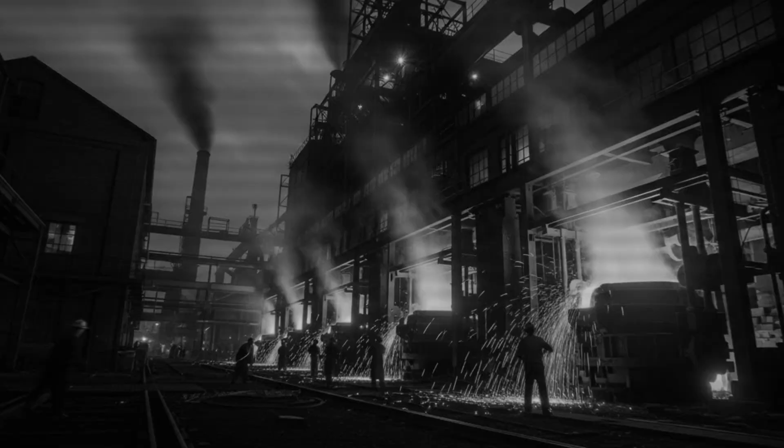As the bomb bay doors opened and thousands of pounds of explosives fell toward the factories below, German fighters swarmed in. Messerschmitts and Focke-Wulfs tore through the bomber streams. Tracer fire stitched the sky. Aircraft burned. Crews bailed out. Others vanished in spirals of smoke. By the end of the day, 60 B-17s were gone. Over 600 airmen were missing. More than 100 were dead.

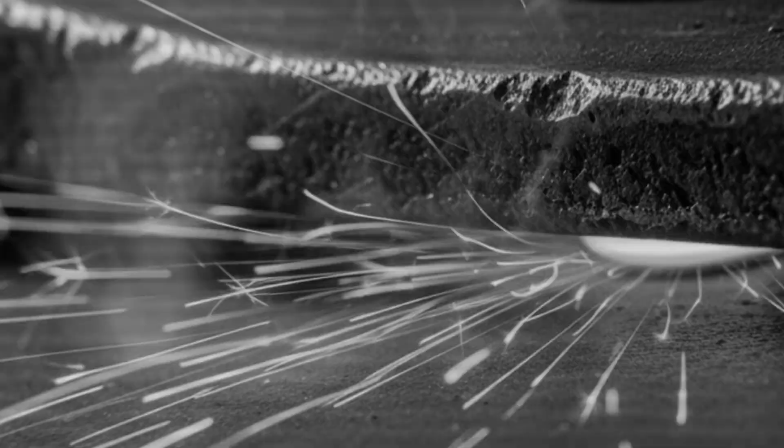While American crews were dying over Bavaria in an attempt to cripple German bearing production, something deeply ironic was happening thousands of miles away, in quiet industrial towns across the United States. American factories were already producing a bearing Germany could not easily replace, could not quickly copy, and could not stop by bombing Schweinfurt. A bearing that worked better for most military applications, a bearing that did not depend on German technology at all. Its story began not in World War II, not in Ohio, and not even in America, but in the mind of a German immigrant carriage maker, working in the late 19th century, obsessed with a deceptively simple problem: friction.

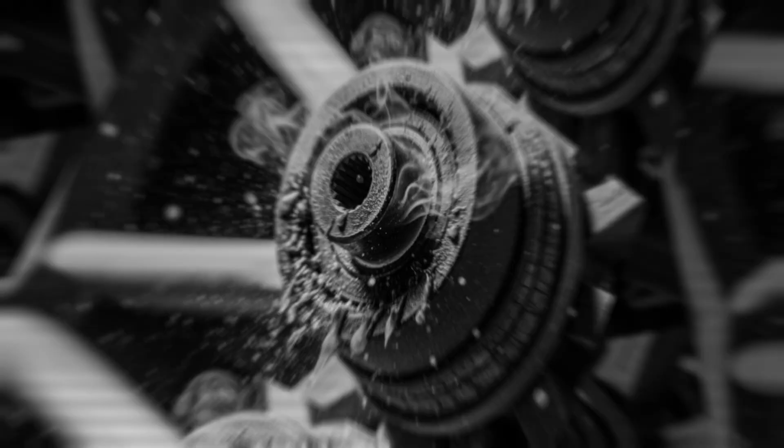Friction is the enemy of motion. Whenever two surfaces move against each other, energy is lost. Motion becomes heat. Metal wears. Efficiency collapses. From the first wagon axle to the most advanced turbine, controlling friction has always been one of engineering's central challenges. Henry Timken believed that anyone who could meaningfully reduce friction would create something of lasting value.

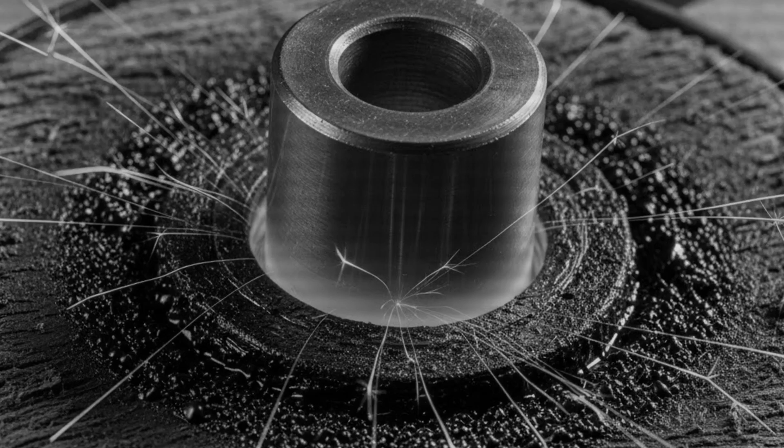He was born on August 16, 1831, in the Kingdom of Hanover, in what is now Germany. When he was 7 years old, his family emigrated to the United States, settling in Missouri. America was young, expanding, and hungry for infrastructure. Wagons, railways, machines, everything was being built, and everything depended on parts that could move reliably under load. As a teenager, Timken apprenticed with a respected wagon and carriage maker. He learned woodworking, metalworking, and, more importantly, the realities of mechanical failure. Axles seized. Wheels wore out. Bearings failed. Every breakdown was a lesson.

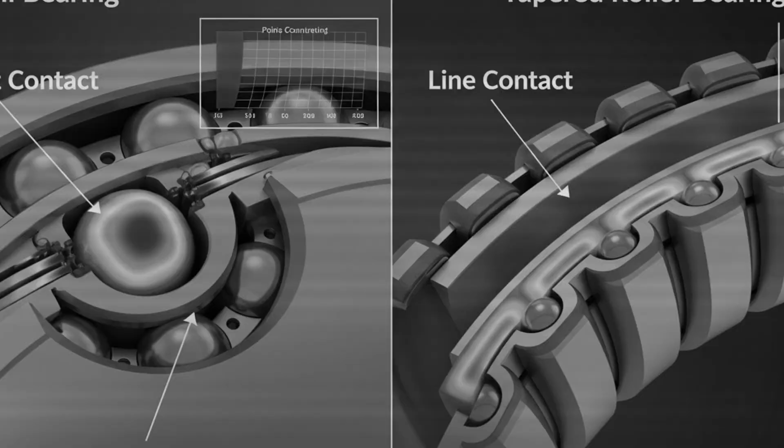By his mid-20s, Timken had opened his own carriage factory in St. Louis. He was not just a craftsman, he was an experimenter. In 1877, he patented an improved buggy spring that distributed load more effectively and survived rough roads better than existing designs. The spring was widely adopted across America and produced under license by multiple manufacturers, generating steady royalty income. The success of the spring brought Timken financial security and time.

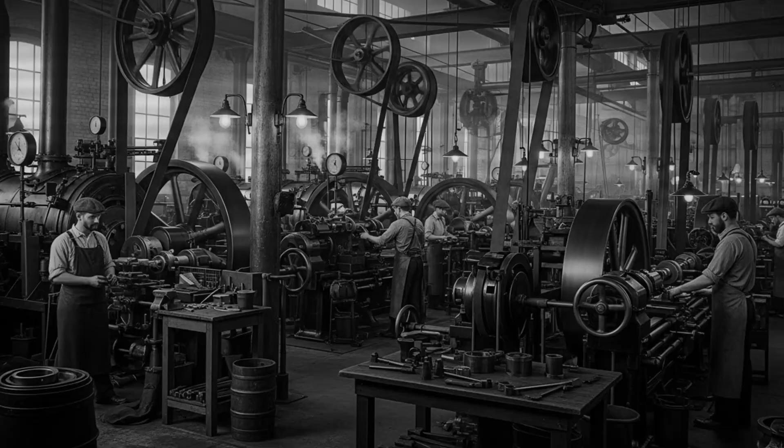Time to think. By the 1890s, he became increasingly focused on friction in wheel assemblies. Traditional bearings of the era were crude by modern standards. Most wagon wheels relied on plain bearings, simple metal surfaces sliding against each other, lubricated with grease. These worked, but they wasted enormous amounts of energy and wore out quickly under load. Ball bearings, which used hardened steel spheres rolling between two races, were a major improvement. They dramatically reduced friction and were ideal for light loads and high rotational speeds.

But Timken noticed a recurring problem. Wagon wheels did not experience simple, straight-down loads. They carried weight vertically, yes, but when a wagon turned, or hit uneven ground, or carried heavy cargo, the wheels experienced side loads and thrust loads at the same time. Ball bearings struggled under these combined forces. Their point contact concentrated stress, causing rapid wear and failure. Timken believed there had to be a better way.

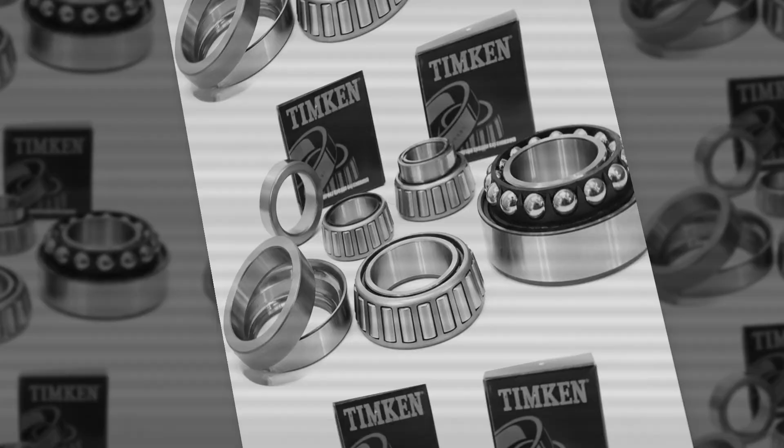With the help of his 2 sons and a nephew, he began experimenting. The solution they developed was elegant and radical. Instead of balls, they used rollers, but not cylindrical ones. The rollers were tapered, shaped like truncated cones, and arranged at precise angles between matching conical races. This geometry meant that loads were distributed along a line of contact instead of a single point. The bearing could handle radial loads and thrust loads simultaneously, exactly what vehicle wheels demanded. On May 1, 1898, Henry Timken was granted patents for the tapered roller bearing.

The impact of the invention was profound. Compared to ball bearings of similar size, Timken's design could carry several times the load, run cooler, last longer, and be adjusted as it wore.

It transformed the way heavy machinery could be built. In 1899, Timken incorporated the Timken Roller Bearing Axle Company, initially operating from a corner of his existing carriage factory in St. Louis. Demand exploded almost immediately.

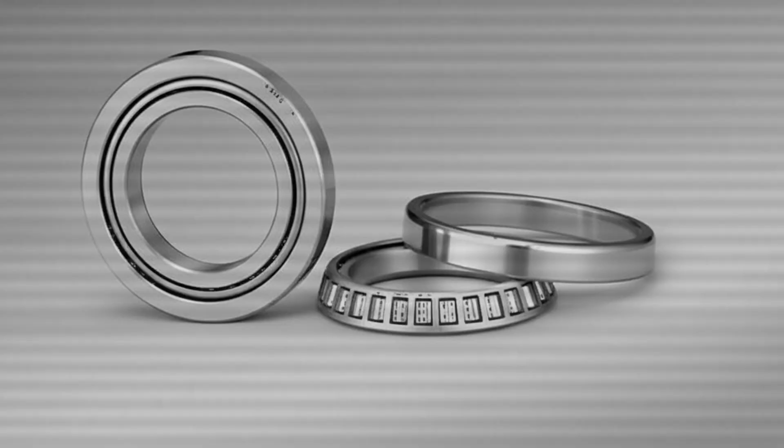By 1901, it was clear that the company needed to be closer to America's emerging industrial heartland. Timken relocated operations to Canton, Ohio, strategically positioned near steel suppliers, rail networks, and the growing automotive industry centered in Detroit and Cleveland.

While Timken was refining roller bearings in America, Europe, and Germany in particular, dominated ball bearing production. German engineers had pioneered precision steel manufacturing decades earlier. In 1883, Friedrich Fischer developed a machine capable of mass-producing hardened steel balls with unprecedented accuracy. His factory in Schweinfurt became the foundation of what would grow into one of the world's largest bearing conglomerates.

Other companies followed. By the early 20th century, German and Swedish manufacturers, most notably SKF, had built global bearing empires. They controlled advanced metallurgy, grinding techniques, and international distribution networks. Before World War I, the majority of ball bearings used in American industry were imported from Germany.

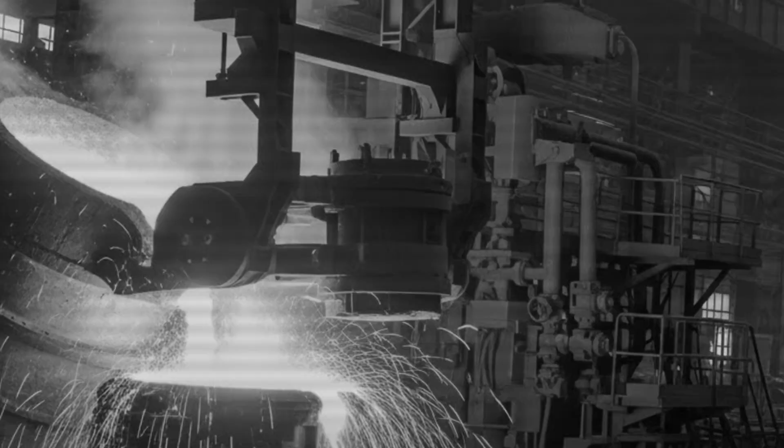Timken himself traveled to Europe in the 1890s, visiting German workshops and observing early internal combustion engines from Daimler and Benz. He understood how far ahead Europe was in precision manufacturing. But he also saw something they did not. European firms were perfecting ball bearings because that was the technology they knew. Timken's tapered roller design addressed a different class of problems: heavy loads, combined forces, durability over speed.

By 1920, the Timken company produced roughly 90% of all tapered roller bearings made in the United States. Railroads were early adopters. Tests on streetcars and freight wagons demonstrated dramatic reductions in maintenance and fuel consumption. High-speed passenger trains soon followed. Locomotives equipped with Timken bearings ran faster, farther, and cooler. The technology spread quietly, steadily, without headlines.

When World War I erupted in 1914, Germany's dominance in ball bearing production suddenly became a strategic vulnerability for everyone else. The British naval blockade cut off German exports. American manufacturers dependent on imported bearings faced shortages and soaring prices.

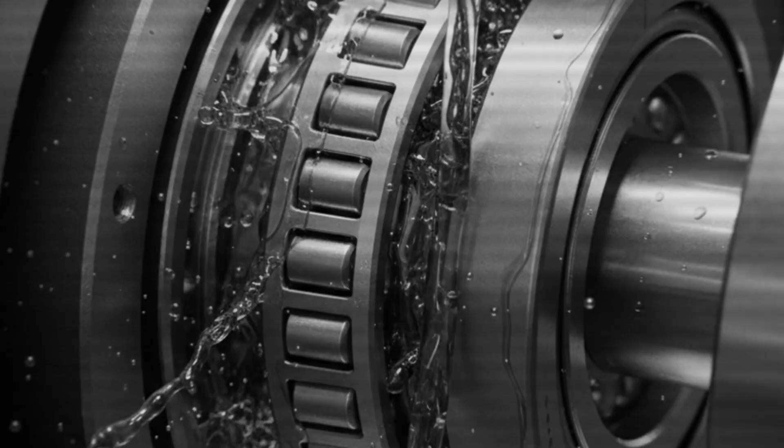Replacing ball bearings was not easy. Precision ball production required specialized machinery and skills concentrated almost entirely in Germany. Timken, however, was in a different position. Its factories already produced a bearing that could replace ball bearings in most heavy applications, and often outperform them. Trucks, artillery, rail equipment, and industrial machinery all transitioned to tapered rollers with minimal redesign.

The war revealed something critical: dependence on a single foreign technology could cripple an entire industrial economy. Timken learned another lesson as well: control of materials mattered as much as design. In 1917, facing steel shortages and inconsistent quality, the company began producing its own bearing steel in Canton. Vertical integration allowed complete control over chemistry, heat treatment, and cleanliness, factors absolutely essential for bearing reliability. This decision would echo through history.

Henry Timken did not live to see the full impact of his invention. He died in 1909. But his sons carried the company forward, expanding production, entering global markets, and quietly embedding tapered roller bearings into the backbone of modern industry. By the 1930s, Timken was one of America's most stable industrial firms, diversified across rail, automotive, agriculture, machine tools, and heavy equipment. When the world slid toward war again, the company was ready.

By 1943, Allied strategists believed that Germany's ball bearing industry was the Achilles heel of the Reich. Intelligence reports identified Schweinfurt as the critical node. What they did not fully appreciate was that Germany's enemies were not equally vulnerable.

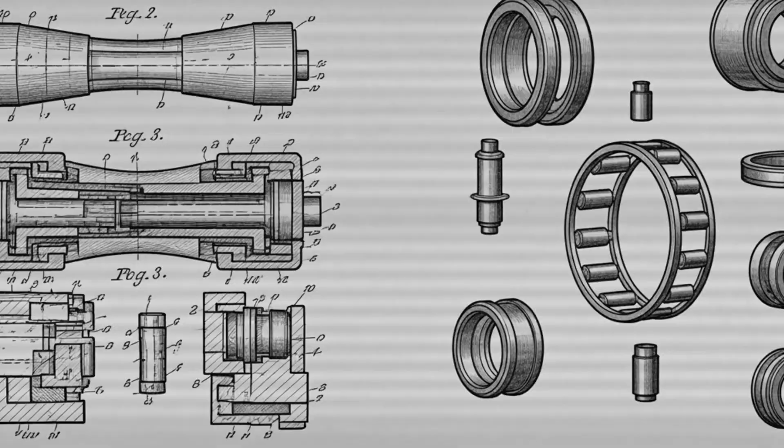Timken plants ran day and night. New facilities opened across Ohio. The company produced bearings for nearly every piece of Allied equipment. Every Jeep used 24 Timken bearings. Hundreds of thousands of Jeeps rolled off assembly lines.

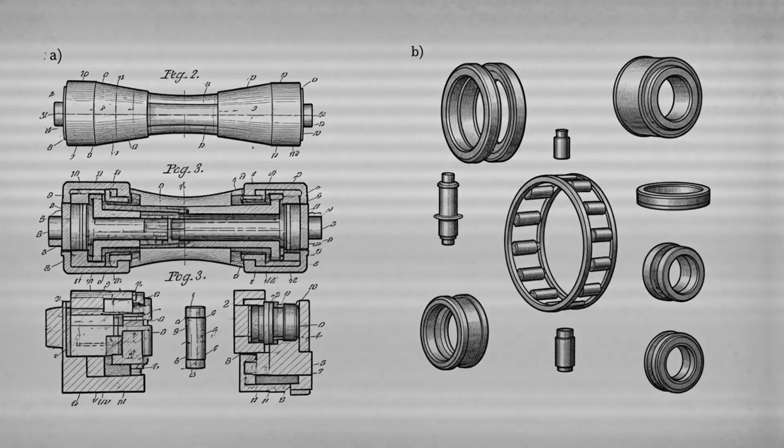Trucks, tanks, artillery, aircraft landing gear, ship propeller shafts, all depended on bearings that could survive shock, dirt, overload, and neglect. Tapered roller bearings did exactly that. They carried more load. They lasted longer. They could be adjusted instead of replaced. And they were made entirely within the United States, from steel to finished product. While Germany scrambled to protect centralized ball bearing plants, America quietly solved the problem by not needing them.

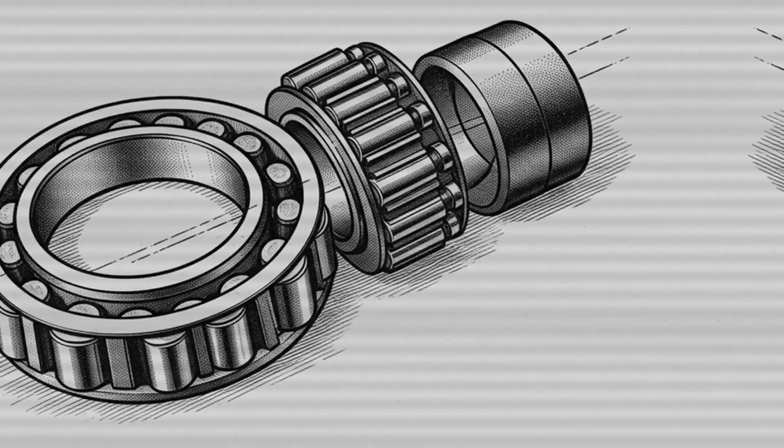The physics behind that advantage were simple, but devastatingly effective. A ball bearing touches its race at a point. Under load, that point deforms slightly into a tiny oval, but the contact area remains extremely small. Stress concentrates intensely at that spot. Under heavy combined loads, only a few balls carry most of the force, accelerating fatigue and failure.

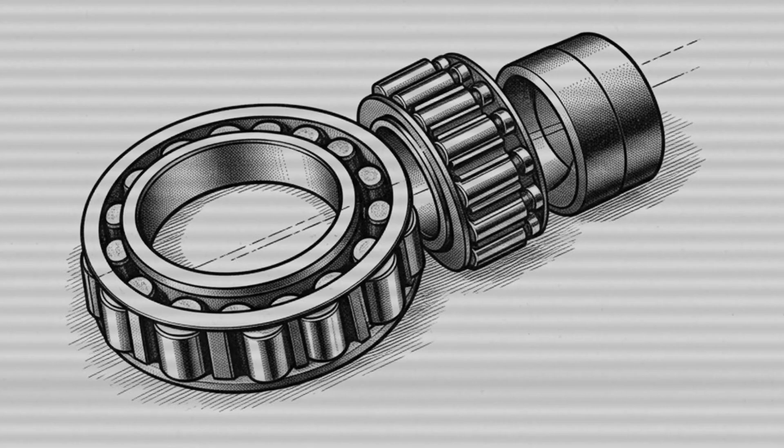A tapered roller bearing works differently. Each roller contacts its race along a line. Under load, that line spreads into a narrow rectangle, dramatically increasing contact area. Stress is distributed instead of concentrated.

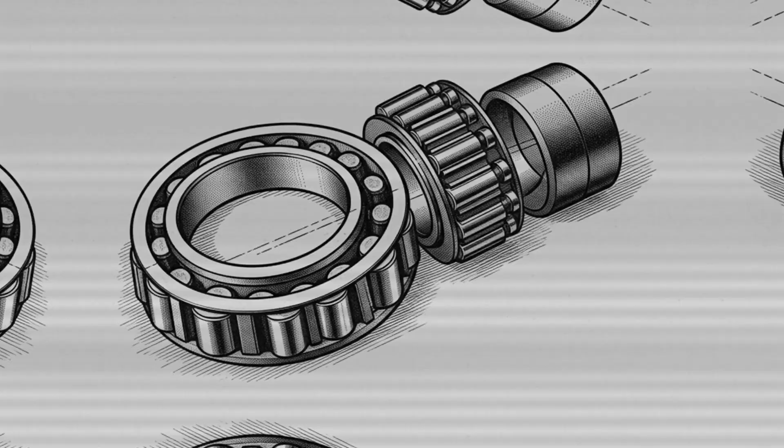All rollers share the load more evenly because of the bearing's geometry. Heat dissipates faster, wear slows, and service life extends. For high-speed, light-load applications—electric motors, instruments, machine tools—ball bearings remained ideal. But for military vehicles grinding through mud, shock, and neglect, tapered rollers were superior.

German engineers understood this in theory, but theory does not win wars. By the time World War II began, Germany's bearing industry was deeply invested in ball bearing production. Retooling factories, retraining workers, redesigning equipment—all of it would have required time Germany did not have. War freezes technology in place. You fight with what you already make.

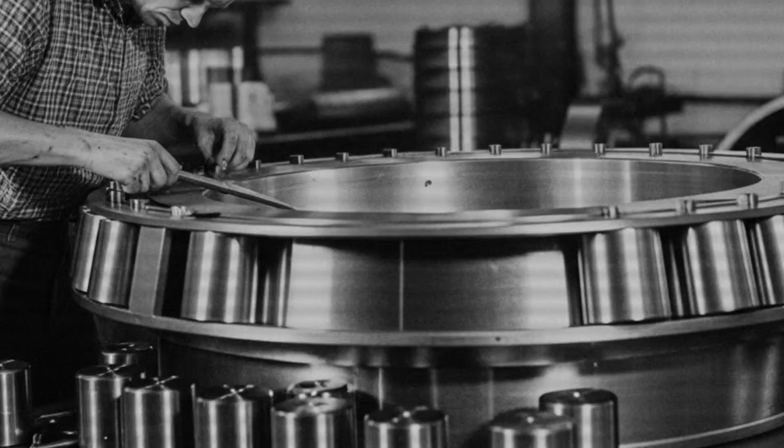America, by contrast, entered the war with dispersed, vertically integrated bearing production built around tapered rollers. The difference would never appear on a battlefield map, but it would shape every battlefield outcome.

After the disastrous Schweinfurt raids of 1943, Allied bombing strategy shifted. Long-range fighter escorts were still unavailable, and loss rates were unsustainable. The ball-bearing campaign faded into history as one of the most costly air offensives with the least decisive results. German armaments minister Albert Speer later admitted that concentrated attacks might have crippled production, but only if sustained.

They were not. Germany adapted. Underground facilities replaced centralized factories. Imports filled gaps. Stockpiles grew. By 1945, Germany actually held more bearing inventory than before the raids began. The airmen paid the price anyway. But the outcome of the war did not hinge on Schweinfurt. It hinged on logistics, and logistics hinge on components that almost no one notices, until they fail.

During the war years, Timken's output more than doubled its previous peak. The company manufactured hundreds of millions of bearings. Its factories produced gun tubes, rock bits, steel tubing, and precision components that fed every branch of the Allied war machine. The Timken Ordnance Company alone produced tens of thousands of artillery barrels.

New plants opened in Zanesville, Columbus, Newton Falls. Employment surged. Production never stopped. Every bearing that did not fail meant one less vehicle sidelined, one less repair crew diverted, one more convoy that reached the front.

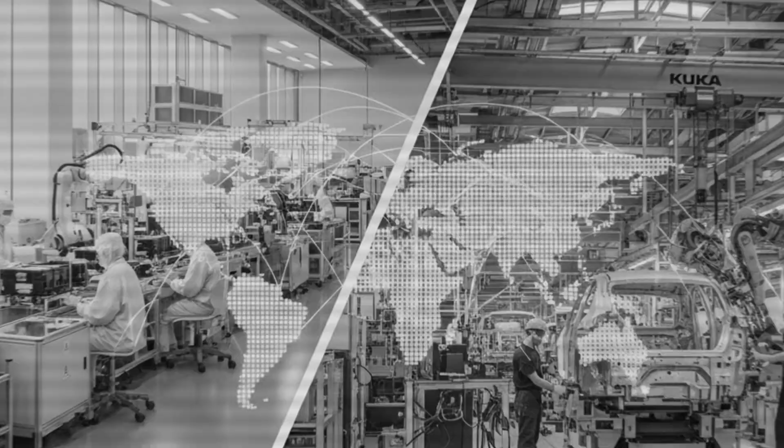The advantage compounded invisibly. German industry fought the war with chronic bearing anxiety. American industry barely thought about it. That contrast mattered. After the war, American machinery flooded Europe under the Marshall Plan—tractors, locomotives, factory equipment, much of it fitted with Timken bearings. European industries rebuilt using American components, not because of ideology, but because they worked.

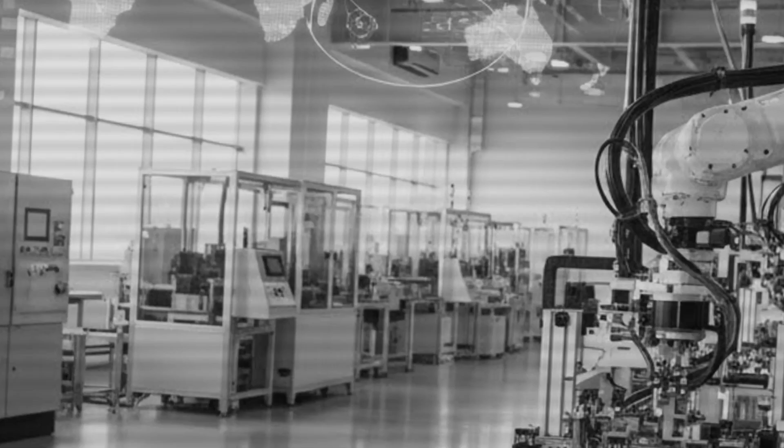Ironically, this success created legal trouble. In the post-war years, the US government pursued antitrust cases against American firms with international agreements. Timken was accused of restraining trade through territorial arrangements with its British and French affiliates, agreements originally designed to manage capacity during wartime shortages. The Supreme Court ruled against Timken in 1951. The company restructured its international operations and moved on.

The growth did not slow. By the 1960s and 1970s, Timken operated on every continent. It entered Japan, one of the world's most demanding bearing markets. It expanded across Europe, Asia, South America, and Africa. In 2003, Timken acquired Torrington, doubling its size and securing its position as a global leader.

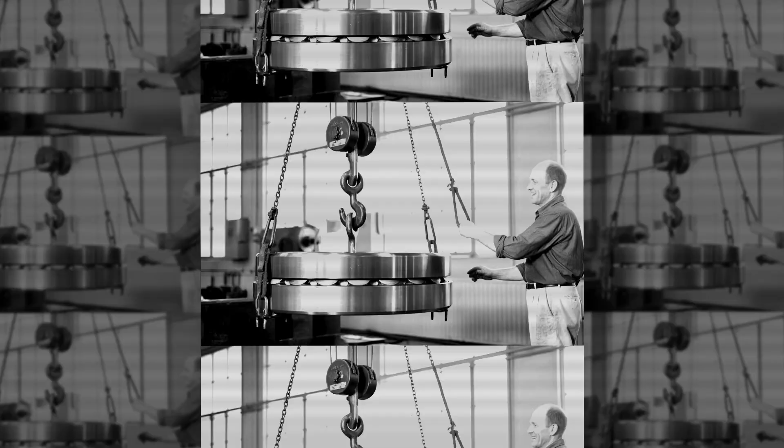In 2014, bearing and steel operations separated, allowing each business to focus independently. By the 21st century, Timken employed tens of thousands of people and generated billions in annual revenue. It manufactured not only tapered rollers, but ball bearings, spherical bearings, cylindrical bearings, thrust bearings, and precision systems for aerospace and industry. Yet tapered roller bearings remained its foundation. From bearings small enough to fit inside computer drives to custom units weighing several tons for steel mills and wind turbines, the same geometry patented in 1898 remained central.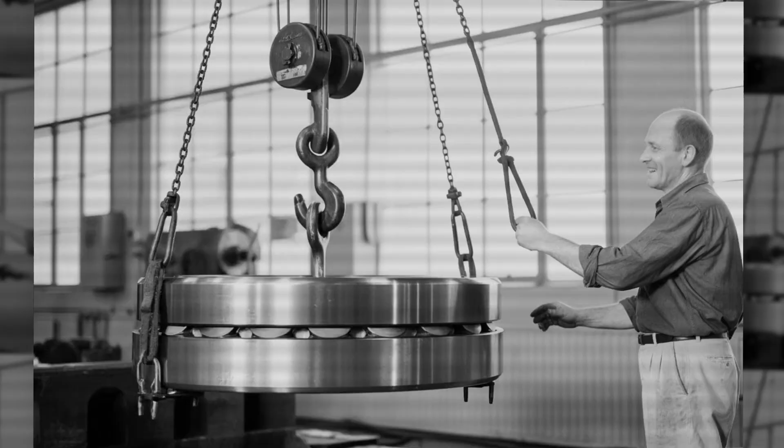The physics had not changed. The final irony of the story is this: Henry Timken was German by birth. He learned precision from German craftsmanship. He studied European engineering firsthand. But it was in America that his idea flourished—not because it was flashy, or dramatic, or politically favored, but because American industry could adopt it at scale.

Germany entered World War II dependent on centralized ball bearing production, vulnerable to bombing and blockade. America entered the war with diversified bearing technology, domestic steel production, and a design better suited to the realities of military machinery. No general ever gave a speech about bearings. No medal was awarded for reducing friction. But armies do not move on speeches. They move on axles. And axles move on bearings.

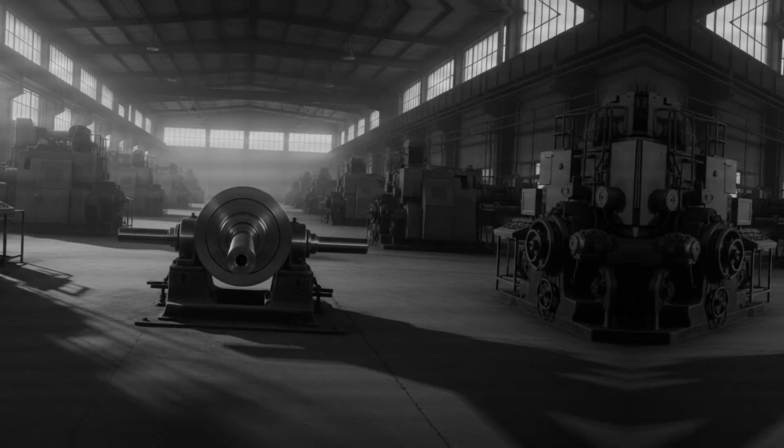While bombers burned over Bavaria trying to destroy German factories, American plants in Ohio quietly produced something better—not through daring raids or grand strategy, but through patient engineering and relentless manufacturing. The bearing war was not won in the sky. It was won on factory floors, where an immigrant carriage maker's idea rolled off production lines by the millions.

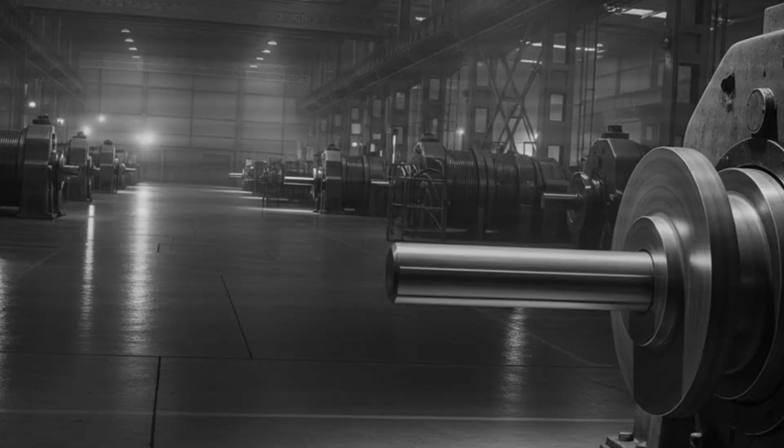Henry Timken never set out to influence global conflict. He wanted to build a better wagon. In doing so, he solved a problem that generals could not, and helped ensure that when the greatest war in history came, American machines kept moving. Friction was reduced. Motion continued. And victory followed.